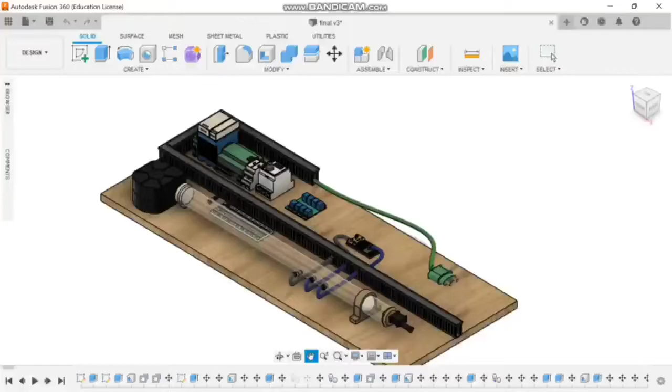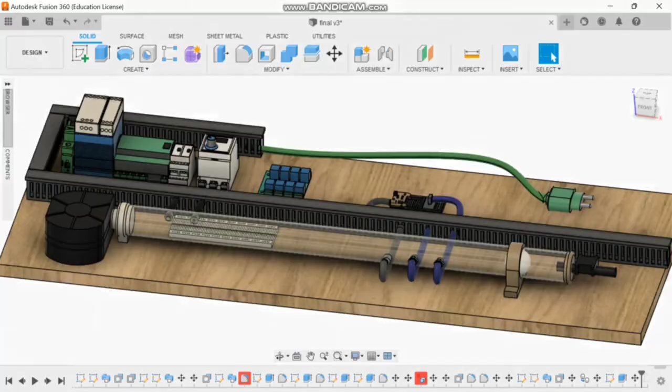The CS307 team designed a model of mechatronics that studies airflow in Fusion 360. This model consists of the following components. First, a layout board on which all the elements are located. Second, a mains cable for electricity supply. Third, a cable duct for hiding wires.

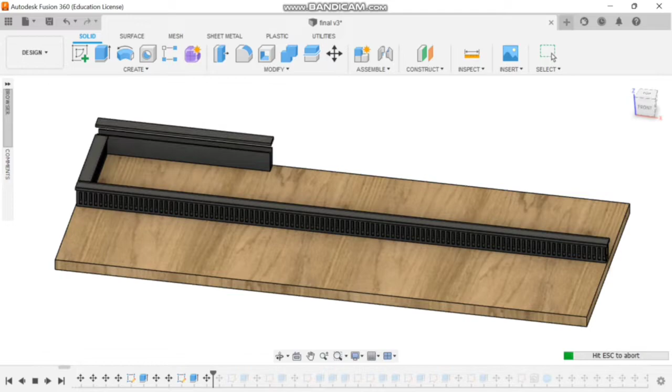Fourth, a fan and pipe that expels air under certain pressure. Fifth, a switch that turns the model on or off. Switch: Mod 4DO industrial expansion module. The device has 4 digital outputs. Outputs are isolated from logic using optocouplers.

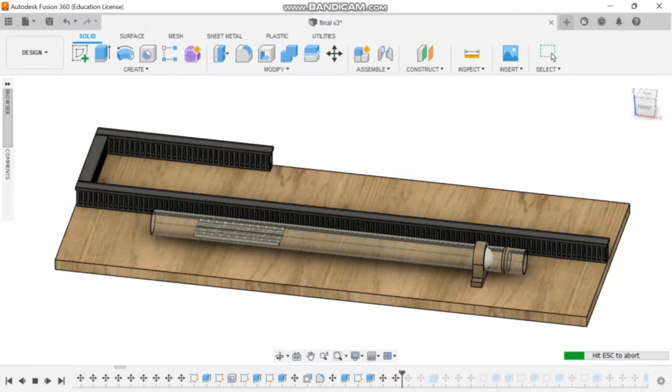This model is connected to the RS485 bus via a twisted pair cable. Communication uses the Modbus RTU or Modbus ASCII protocol. The use of a 32-bit processor with an ARM core provides fast data processing and fast communication. The transmission rate ranges from 2400 to 115,200. Next, the sensors that measure pressure and airflow rate.

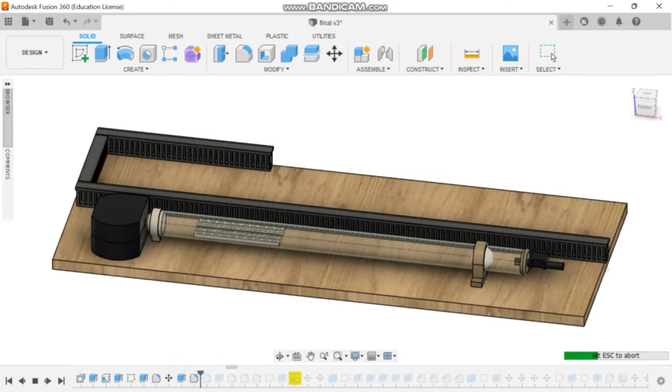Sensor 1. The Mod 8AI module allows you to measure voltage and current. The value is read via the RS485 bus Modbus protocol so that the model can be easily integrated with PLC, HMI or PC controllers with appropriate adapters.

Sensor 2. Mod 1TE allows you to measure temperature values using resistance thermometers PT100, Ni100, KTY81-110, and thermocouples type J, K, T, and S, R, B. The value is read via the RS485 bus Modbus protocol, so you can easily integrate the model with popular PLC, HMI, or PC controllers with appropriate adapters.

Sensor 3. The Mod ETH module is an innovative device that converts Modbus TCP to Modbus RTU or ASCII. The device has an Ethernet and RS485 interface, 4 digital inputs with counter, and 3 relay outputs.

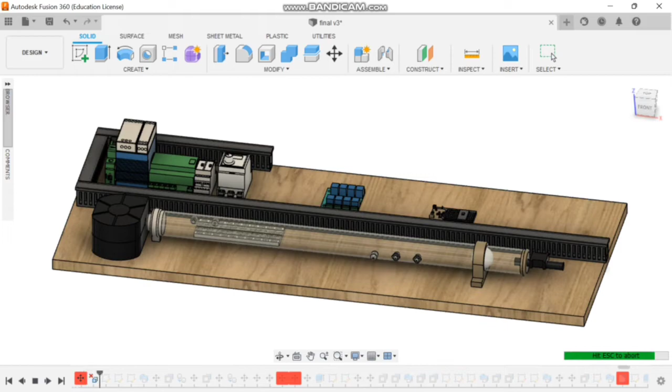Up to 128 Modbus I/O modules from the Slim, Mini, Standard series and other manufacturers can be connected to the Mod ETH interface via the RS485 interface. The data collected by the RS485 is transmitted via the Ethernet interface, Modbus TCP.

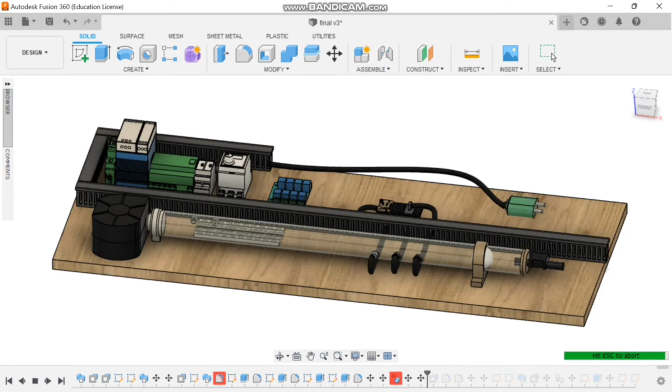Slim series models can be easily connected to each other and to the Mod ETH model via a quick connector. All you need to do is put the models together and connect RS485 on the first model.